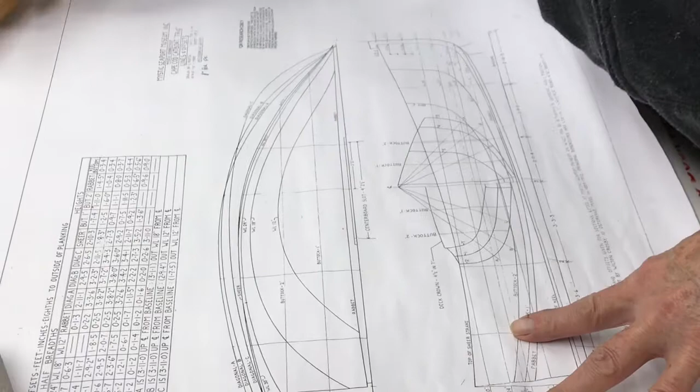This is a set of plans for a nice little cat boat called Trio. It's at Mystic Museum.

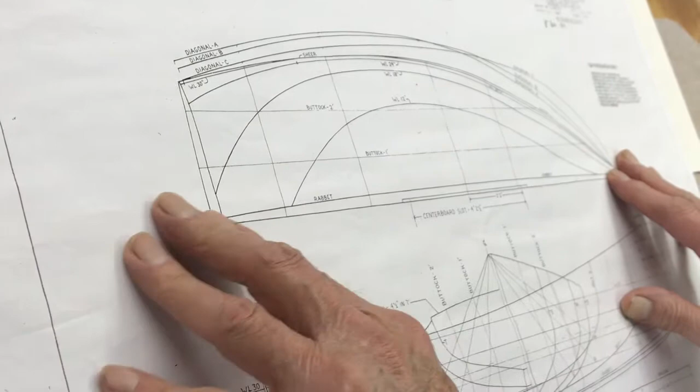Alright, I bring the back of the model right to the edge just so I don't have to cut that.

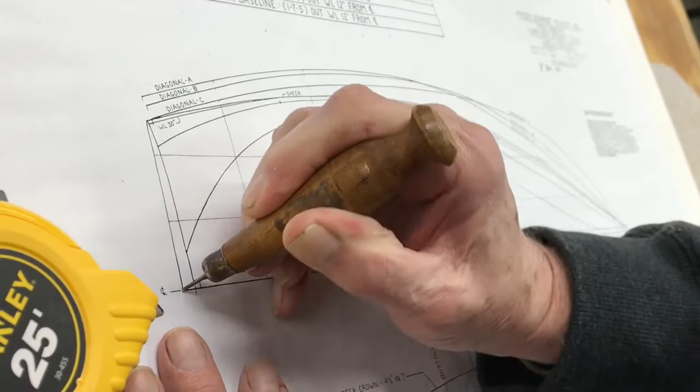Then I just take a little small awl. There's probably other tools you can use. This is just white poster paper, what I call it. They make it thinner now.

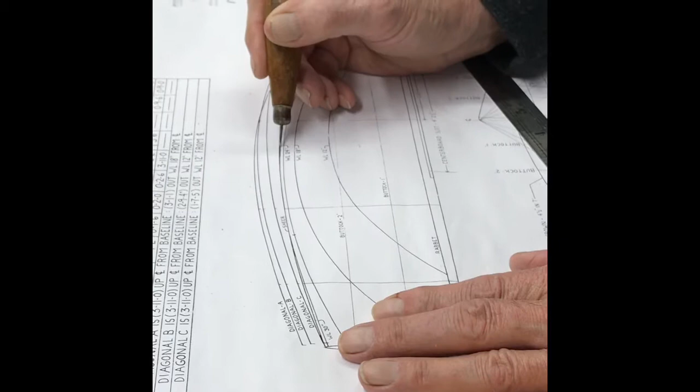So you were going along the sheer line. Yep. I just put these pencil marks in. Makes it just a little easier.

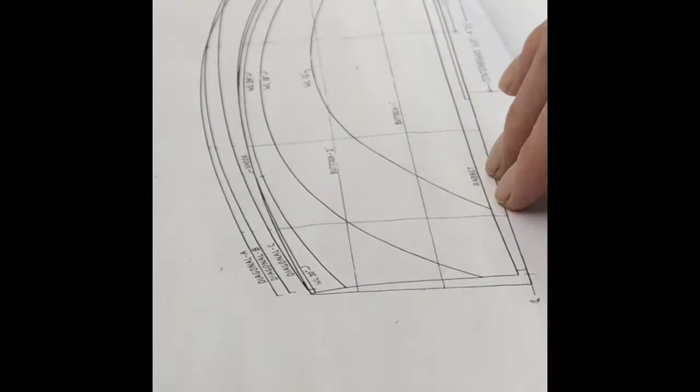You have your deck. How do you get the ones that you do the different stages from the bow to the stern for the hull shape? We're going to do that in a minute.

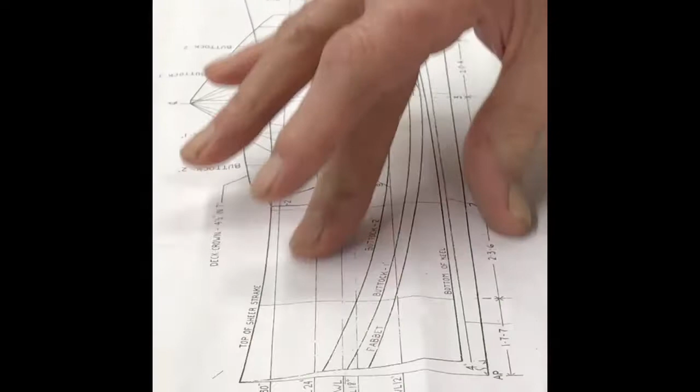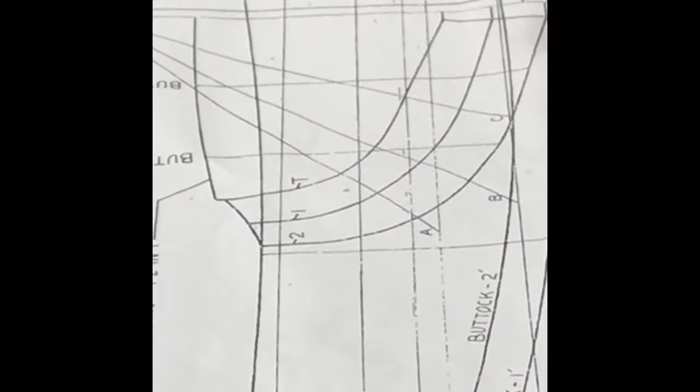Now we're going to do the hull, the shape of the hull, and it's very, very important that you get your load water line right here. It goes all the way across, and we have to follow it when we make all our stations. Oh, I see the stations. So they're there. Very important.

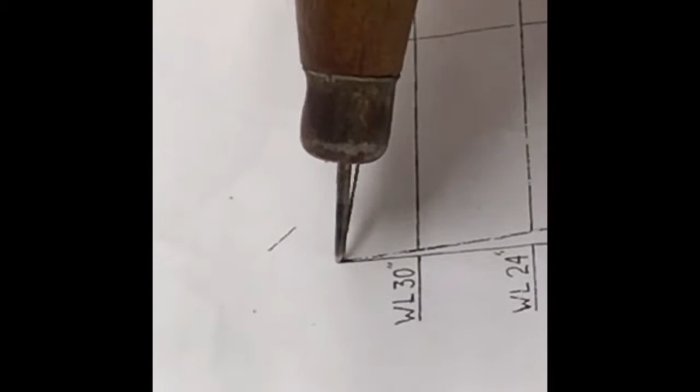Now, when we make it, we're not going to put the stem in. That goes in afterwards. Okay, so this is the top of the sheer. I'm sure there's a better way of doing this, but I don't know how.

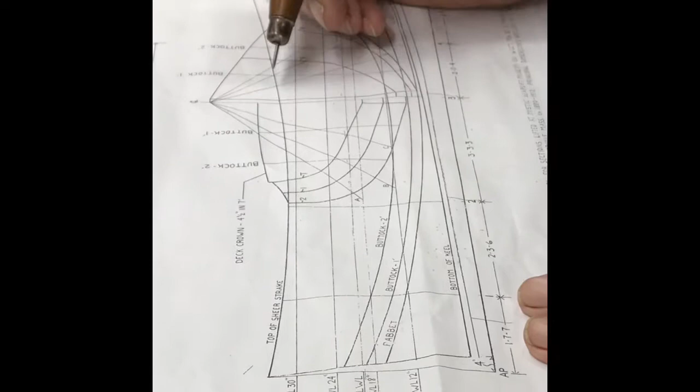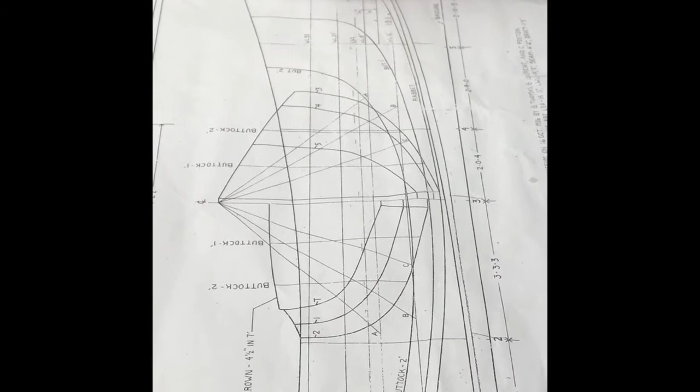They want to build Trio at the Hyannis Maritime Museum. They're just trying to get enough money together to build it. Who are they going to have build it? Well, I don't know, they have to find someone. Maybe they already have volunteers? Someone. Yeah, wow.

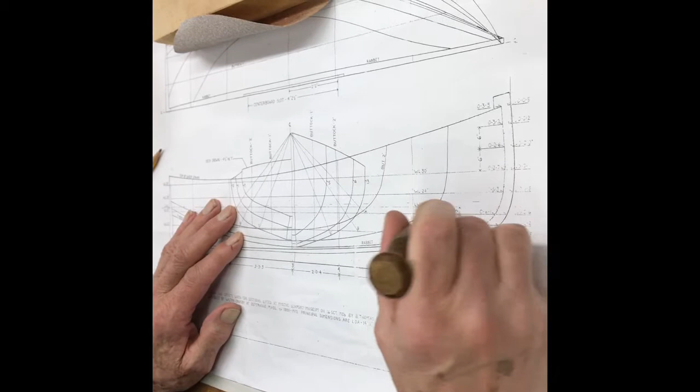That's the water line. I don't want to lose that.

Sorry to interrupt, Malcolm, I just wanted to wish you a happy birthday. Oh, thank you, George, you're welcome. Oh wait, are you filming this? Yeah. Oh, I'll get out of here then. Happy birthday, Malcolm. You'll see yourself on YouTube now, George. You'll be famous. I don't care. Yeah.

All right, so all you gotta do is connect the lines and cut it out for that.

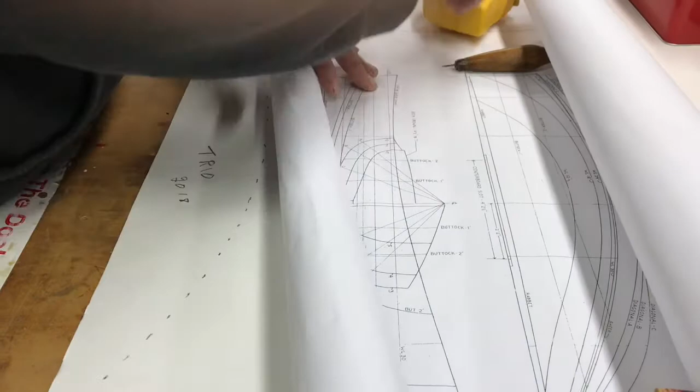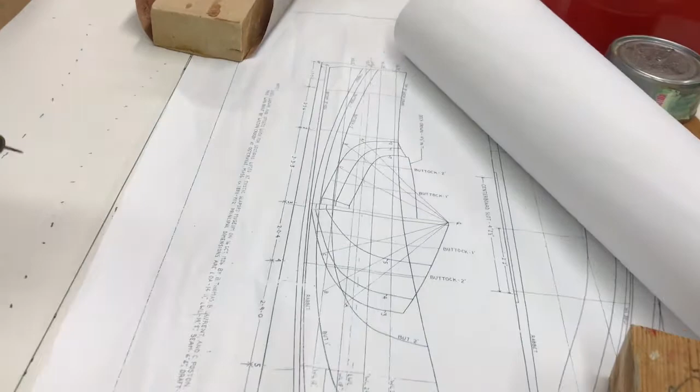Now you do the same thing to get your stations. Templates, whatever you want. This one here is the stern. And number 2 and number 3 are the widest part. You just want to make sure.

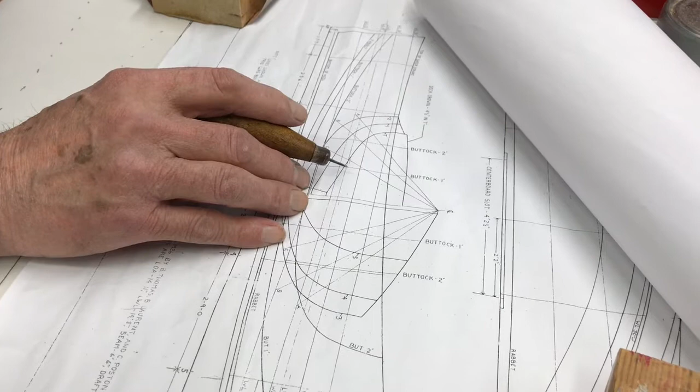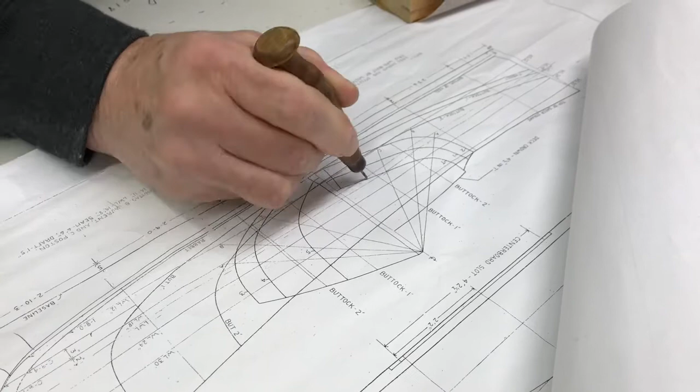You don't need the water line on the stern, but we want to get the shape of the stern. How come you don't need the water line on the stern? Because it'll just come in automatically when we're cutting the wood. Yeah.

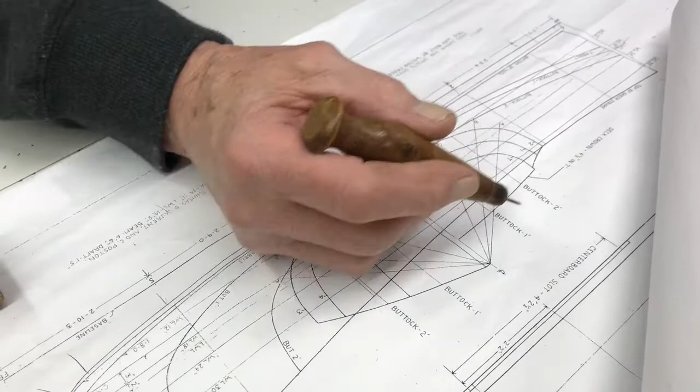Now see that this has got a curve to it, but we're not using the curve on a half model. You don't normally show the curve of the deck, so the stern's going to come across straight. Okay, you can always add it if you want. So, see if I...

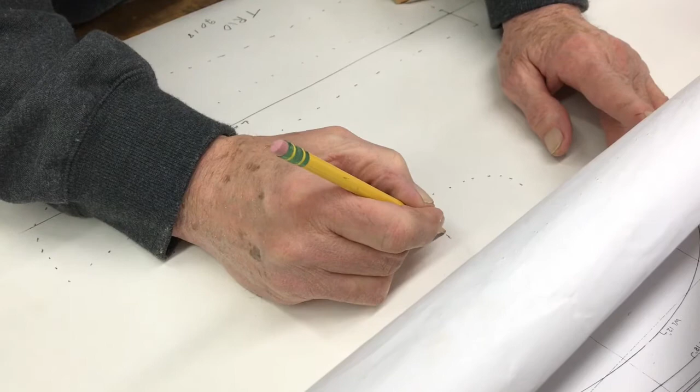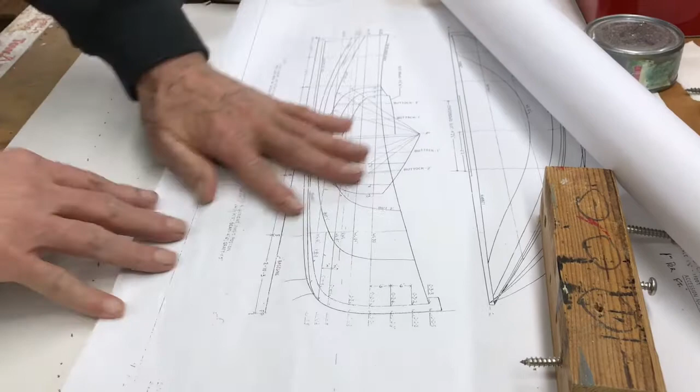Okay, now we have to keep moving, so I usually do these one at a time. Cut them out. Alright, so there we go. Okay, I'm doing number 1 station now.

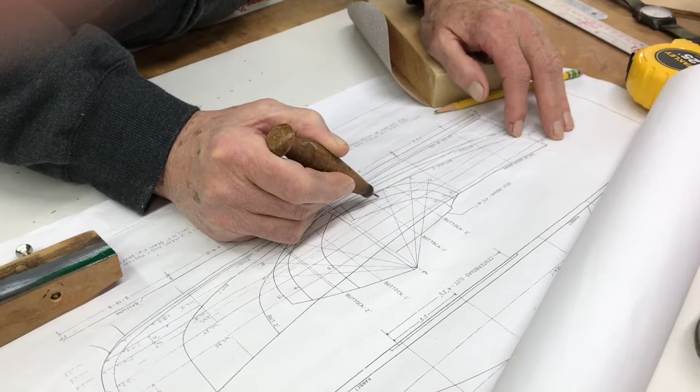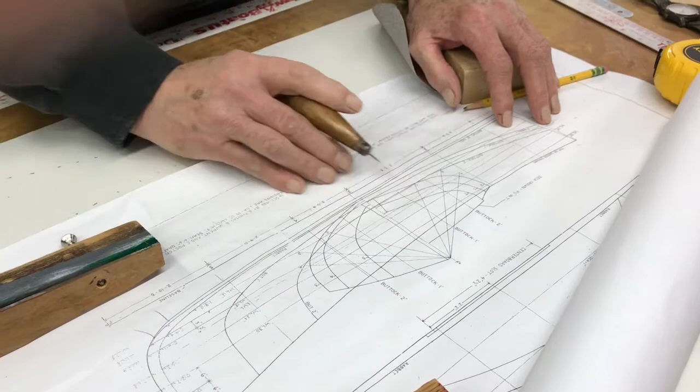And putting in the water line, LWL. Very important to have that. Oh, that's how you make that line where you know how to line it up as your reference. Yep, okay.

All right. Hopefully that gives everybody some idea what I'm doing.

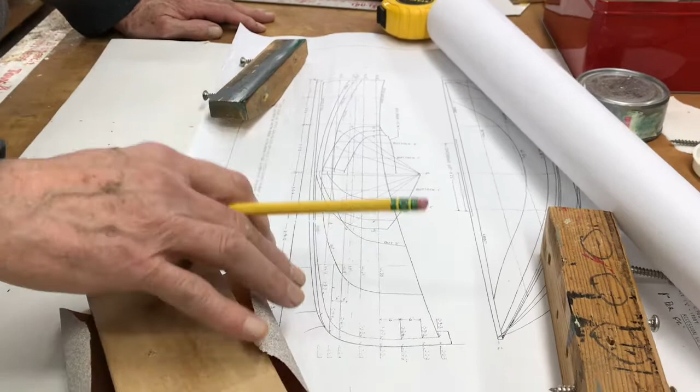And if you just email Mystic or call them, they'll send you the plans? Probably, but the plans I got from them originally was a bigger scale, and I took it to a place and had them put the scale down to the right size, like Kinko's.

Yeah, so that was number one. Then you got number two. Then you switch over. You get number three, number four, number five. Okay, just remember the water line. Yeah, and it's the only way to line it up, very carefully.

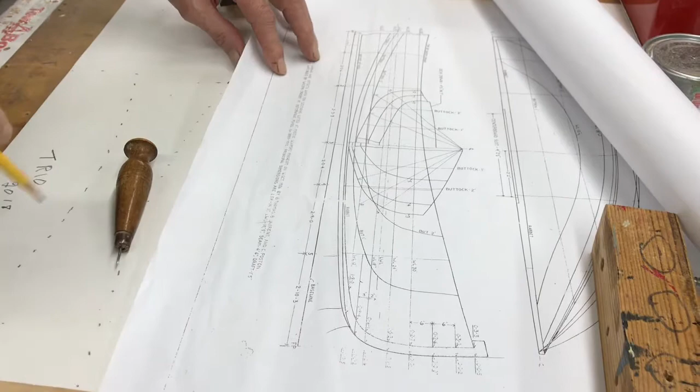Very carefully, cut them out. You just use a really sharp X-Acto knife? No. What do you use? Well, I guess you could use whatever you feel comfortable with. Scissors? I bought a little pair of scissors, and that's what I use.

And then what did you do? Just put like resin on them to keep them? No, I did those because they got wet.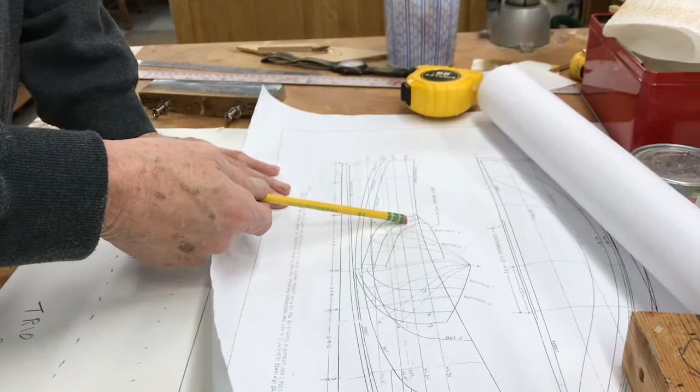Just make sure you mark your stations, and those same stations are on the plans here. There's 1, 2, 3, 4, 5. Okay, yeah, you need those to transfer.

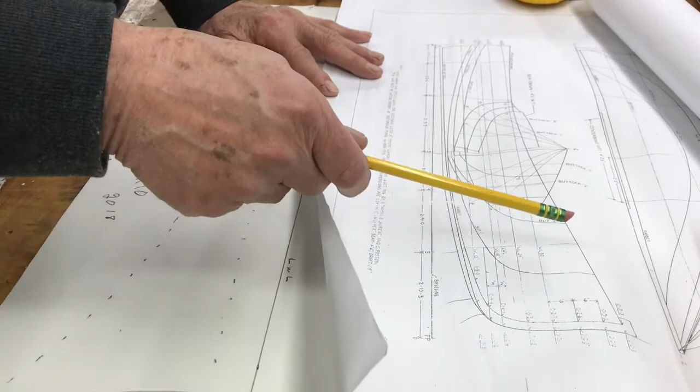And that's where you make your lines on the hull to line them up, right where those lines are at the bottom of the plans. There, there, and there. That makes sense.

It's good if you know someone, if you don't know yourself, that knows a little bit more about plans, because they can probably help you, if I haven't confused you.

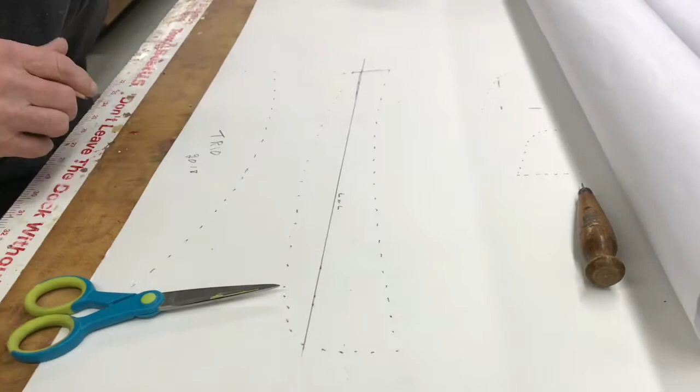All right, but that's how I do it, and you just gotta make the other 4.

And I usually end up with something that looks like this. Waterline, and I just make it like this. Just so you have something to grab onto. Yeah, you need to hold it. Yeah.

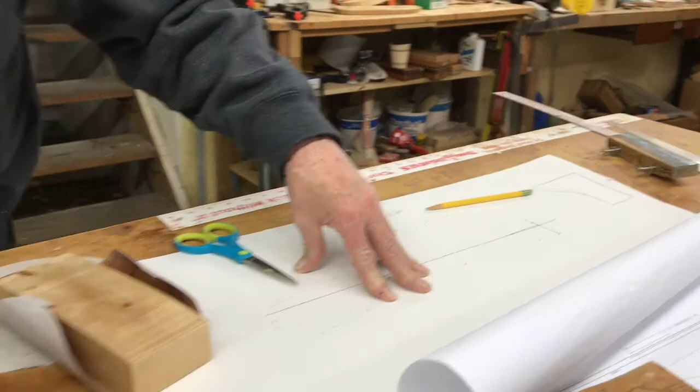And when I get all through, I just take another piece of poster board, and I make a big envelope. Put some clips in it to hold it. That's how I make my envelope to hold all my templates.

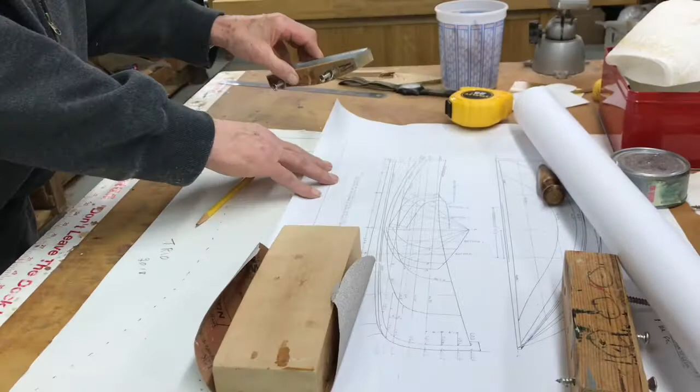So I guess the next time we'll do some little bit more planing and sanding on the half hull. We're not too far from ready to sand. A little more planing, basically amidships is where you're gonna take the most wood off. Okay, great, thanks.